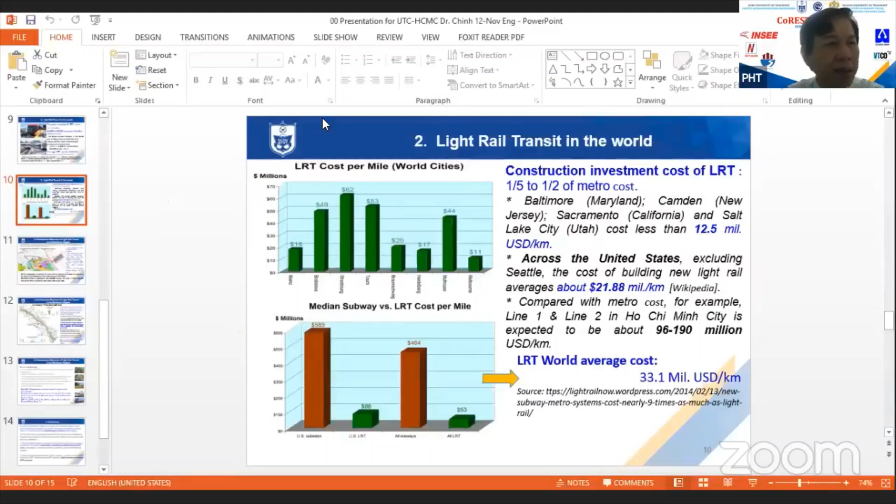The presenter will be Mr. ISHIHARA with the title Opportunity in the Next Decade from Urban Transport. Mr. ISHIHARA graduated from university, and after graduation, he worked at East Japan Railway Company and a consulting company for 14 years as a railway engineer. He was involved in numerous major projects, including restoration and renewal of terminal stations, for example Tokyo Station, a very big station, Shinjuku Station, and Yokohama Station. He was in charge of planning, structural design, and management.

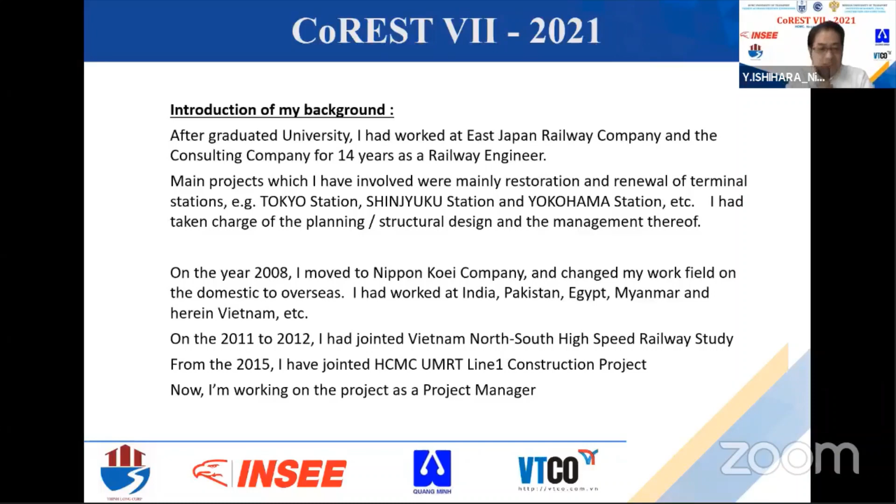Good morning everyone. Dr. Huang, thank you very much for the introduction. Today I'd like to talk about what happened in the previous 10 years for Ho Chi Minh City urban railway development, and what we should do for the next decade to develop the Ho Chi Minh City railway network.

When I first came to Vietnam in 2011, Hanoi MRT Line 1 was just at the basic design stage, supported by a Japanese ODA project. Line 3 was just before commencement of construction. In Ho Chi Minh City, our Line 1 was in the tender preparation stage. Not only railway, but also the east-west expressway construction had been started.

Also, there was an announcement for starting the feasibility study of the new Long Thanh international airport. Under such a situation, I participated in the North-South Vietnam high-speed railway study, where we also considered how to link Ho Chi Minh City Central to the new Long Thanh international airport, like this.

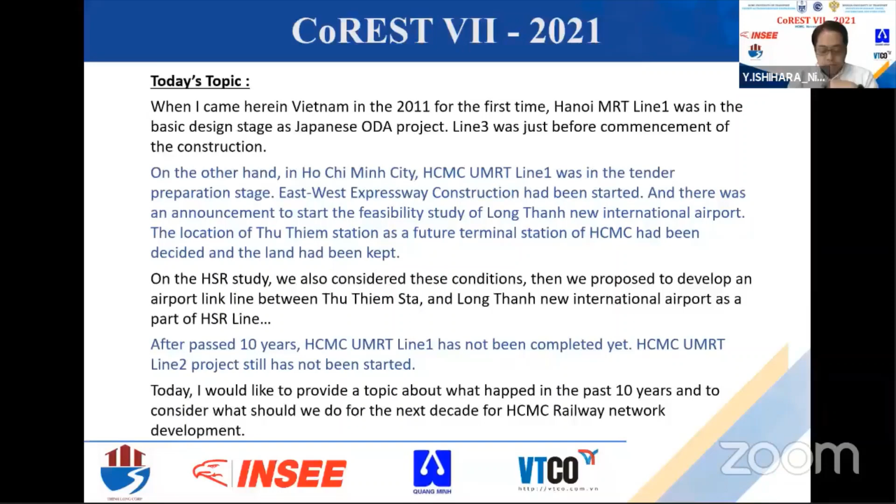After the past 10 years, unfortunately even Line 1 has not been completed and cannot start operation. So today, I'd like to introduce some facts and propose some ideas for the future.

There were existing approved plans in Hanoi and Ho Chi Minh City. In Hanoi, 8 MRT lines were planned. In Ho Chi Minh City, 6 MRT lines were planned. Of course, the master plans were approved in 2011 and 2013, but almost all the basic plans were developed before 2010.

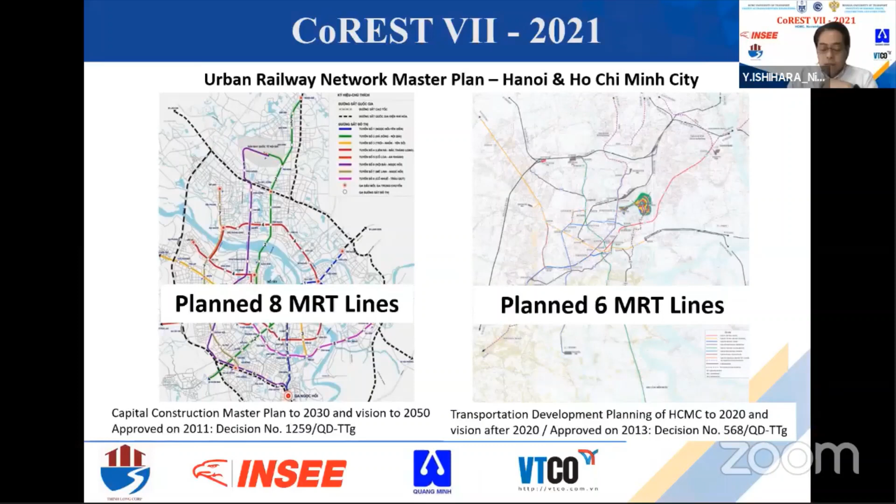After that, in Hanoi, Line 2A, the green line, started in 2011. Line 3, indicated by the yellow line, started in 2010. In Ho Chi Minh City, our Line 1 started in 2012.

I'd like to say congratulations on starting operation for Hanoi Line 2A. I can imagine how difficult it was to reach this operation. Now we are also facing a similar problem to reach official commercial operation.

In Hanoi, construction of the 2 lines is almost all completed. Both lines are elevated. Hanoi Line 2A is around 13.1 kilometers, Line 3 is 8.5 kilometers. Line 3 has an underground section, but that's not completed yet. On the other hand, Line 1 has 19.7 kilometers, with an underground part plus elevated section.

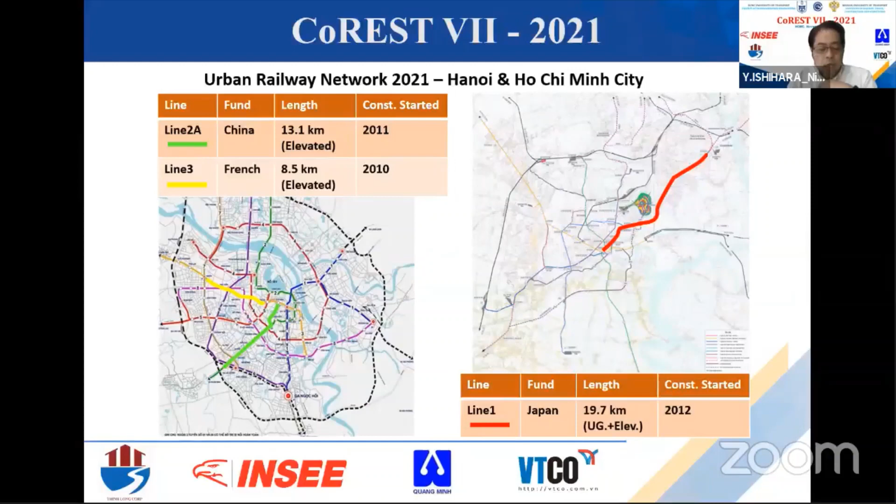This is the existing image of the Line 1 construction. This is the situation at Ben Thanh station - structure construction is almost all completed, and now backfilling and reinstatement of the ground is continuing. This is the Ba Son station situation, now installing railway facilities and doing final finishing.

This is the situation of the elevated station. This is a shield tunnel - the first railway shield tunnel here in Vietnam.

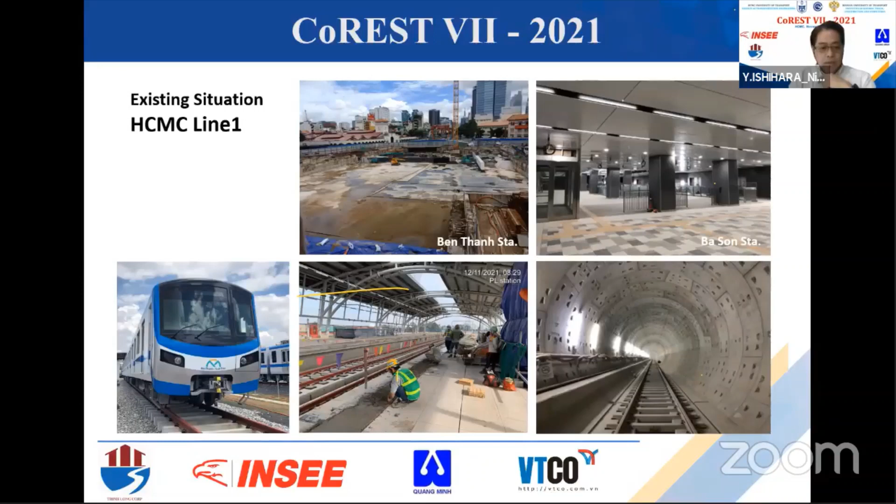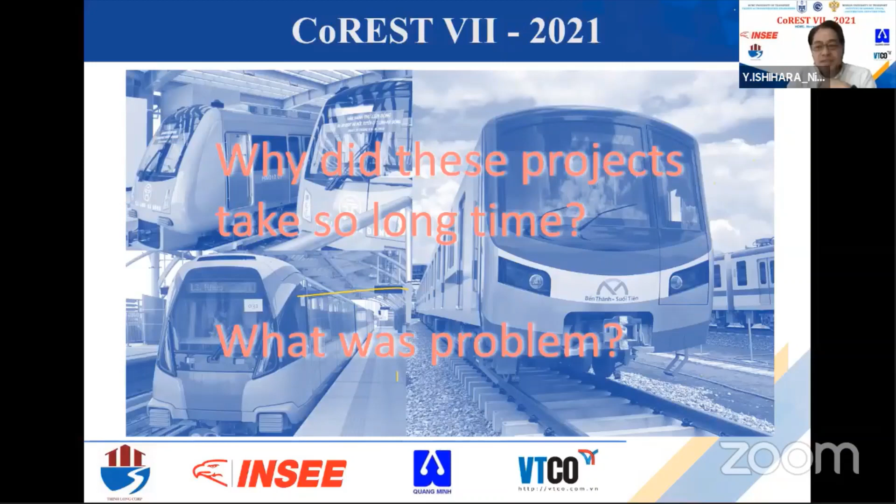So why did this project take so long? What was the problem? I've received so many questions from so many people. There were a lot of kinds of problems on the project, but especially for Ho Chi Minh City Line 1, the main problems were land acquisition and utility diversion, contractual problems, and unfamiliarity with urban railway projects, cost, and budget.

Anyway, if we look at them positively, they were good lessons. Here in Vietnam, we experienced 3 MRT projects with support from 3 countries, almost all at the same time. This is quite unique and a good lesson, I think. So the important thing is don't make the same mistake twice in the future.

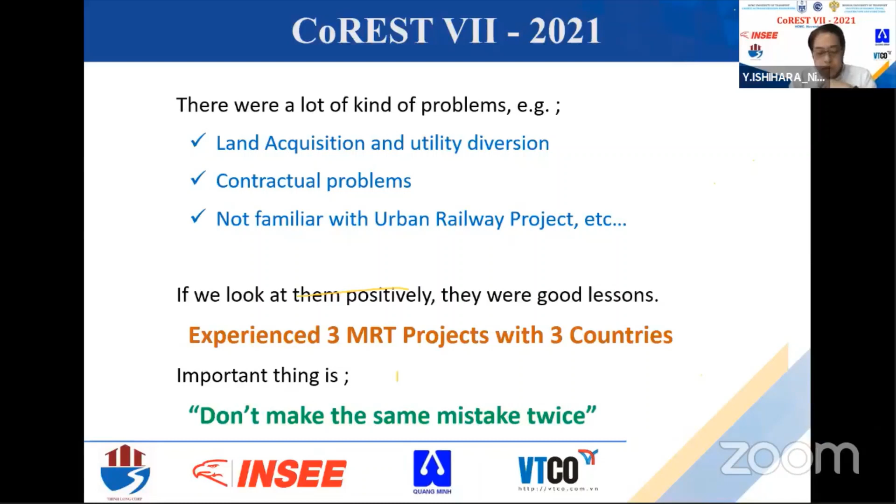Now the social system is changing. System change is required due to climate change, environmental damage, etc. At the last COP26, we discussed this issue also - we are requested to reduce CO2 drastically and quickly. But we also have to consider the balance between social growth and nature conservation.

So development and redevelopment of the public transportation system shall be accelerated. That is important.

Recently, the Vietnamese central government, the Prime Minister, decided and announced for Ho Chi Minh City area a master plan, target 2040 to vision 2060. Also approved the railway network plan for 2021 to 2030, vision to 2050, such like lines nominated.

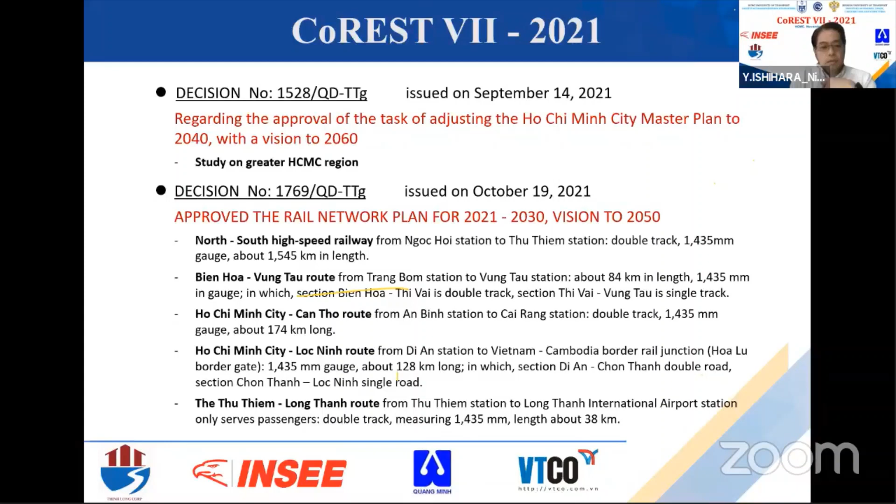So what is needed for future railway network development? How should it be considered on the next transportation plan? I know there are many ideas and objections, but I would say we should not aim at ideal ideas excessively. Consider a realistic plan with practical strategy.

In particular, we should not plan only for urban railways, but consider a comprehensive transportation system, prioritize projects, consider synergy of projects, not only railway, but also road and expressway projects, and should consider regional growth and benefit, not only city-inside transportation, but also intercity connections and logistics networks.

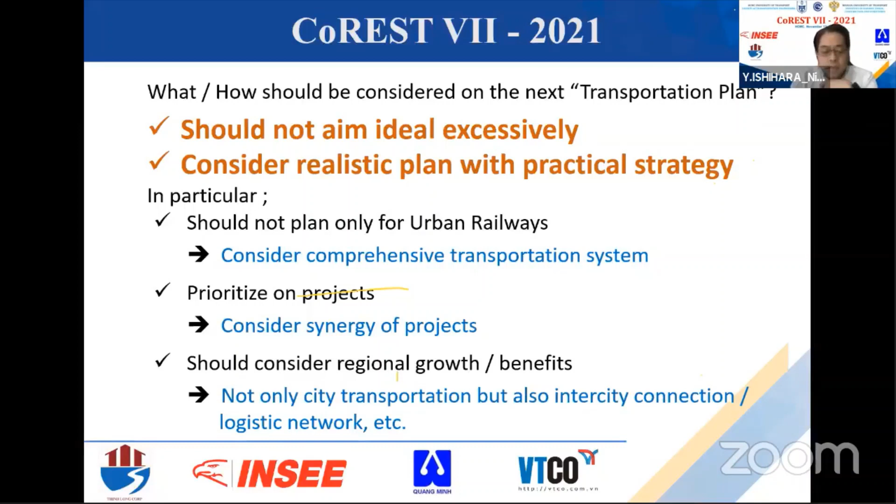Then how to feedback lessons learned to the next project. I'd like to say, look back at each project, then list out problems and troubles, share the information, share experience and lessons, study countermeasures, reflect them in official regulations or instructions. Finally, feed back to the actual project, reflecting on bidding and contractual documents.

So about the strategy for establishment of the Ho Chi Minh City urban transportation network. Shall we develop considering development easiness? Easiness means not only normally, but we will consider theoretical analysis, academic analysis based on collecting actual data or future plan data.

But take into consideration the physical project progress. We faced so many problems compared with the plan on the desk. Especially for underground construction, it's quite complicated and takes time and cost, very complicated. We need so much discussion.

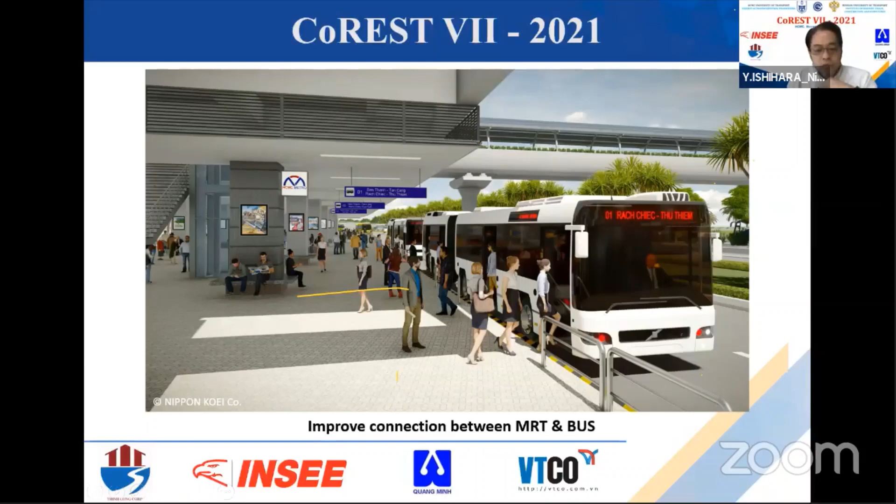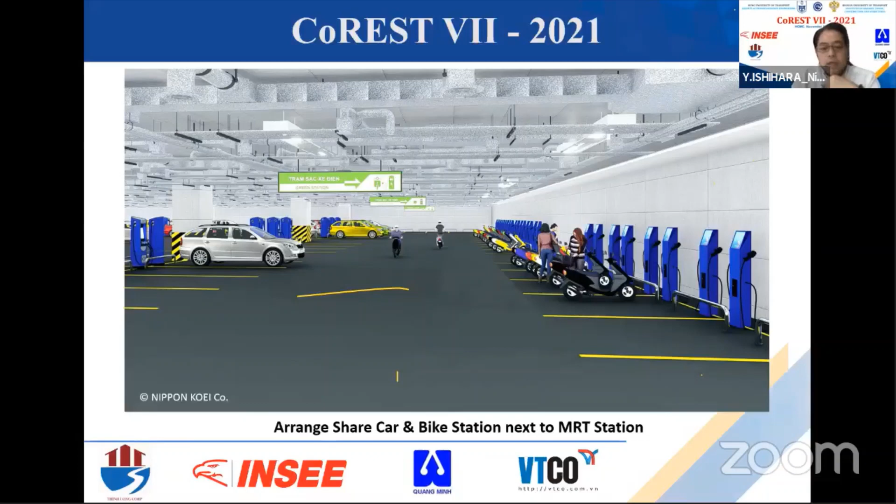One more idea is to develop bicycle and car parking, not only private ones, but share and rent bikes or rent a car near the station. This is one of the ideas.

So the third strategy is consideration of intermodal facilities with city development. This is one of the images. Now we are just developing and constructing a metro station, but unfortunately not including such intermodal facility development or coordination with future development near the station.

So for future projects, we should consider at the beginning things like the connection between the metro line and another feeder transportation—how to develop and realize an effective connection that is much easier and more convenient for passengers.

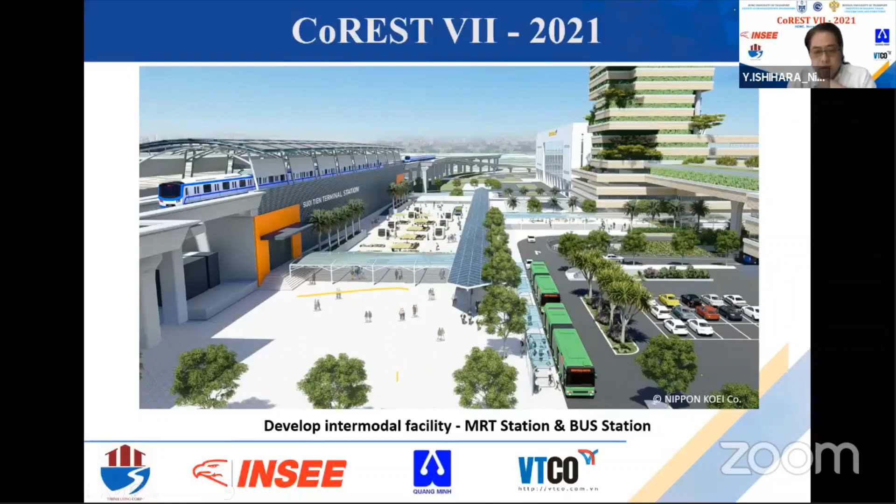The fourth strategy is to consider multi-purpose use. This is one idea for utilizing underground space. As you know, underground development is quite expensive and takes a long time, so using it only for the metro line is not so feasible. It should be utilized not only for part of the station, but also in between stations, using underground space as a corridor for passengers, a corridor for utilities, and for parking space.

One more idea is to develop a reservoir tank for keeping flood water temporarily. Such multi-purpose development will help city infrastructure development more effectively.

So the fifth one is to unify the standards and specifications as much as possible. Infrastructure development now requires not only railway, but also a road system, bus, shared ride, and other modes.

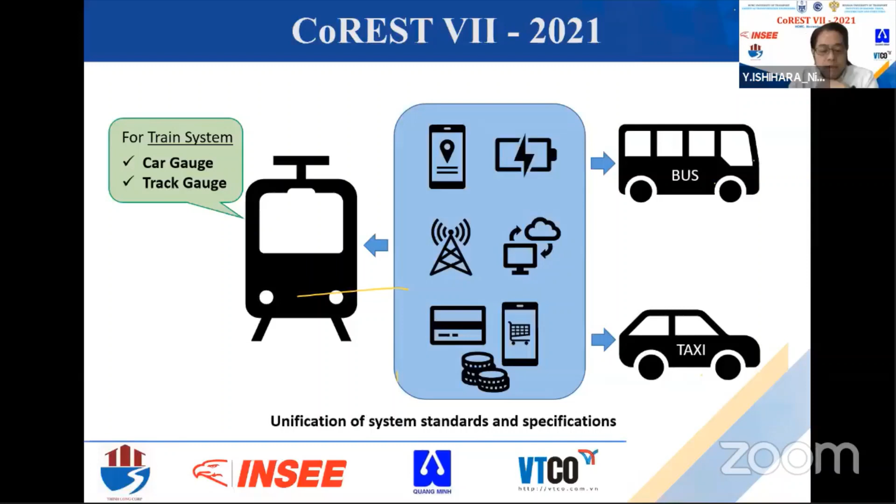Also between the railway system and other bus and taxi systems, applications should be unified, including battery system or propulsion system, energy supporting system, telecommunication system, data collection and accumulation system, monitoring system, and accounting system. Such a basic system will be one of the city infrastructures for the future, digital infrastructure for the future.

So the last one is to create reasonable regulation. As I mentioned, underground construction has so many problems and takes time and cost. One reason is, according to existing regulation, the land above the tunnel should be purchased in advance. After completion of the tunnel construction, it cannot be utilized for private companies' development.

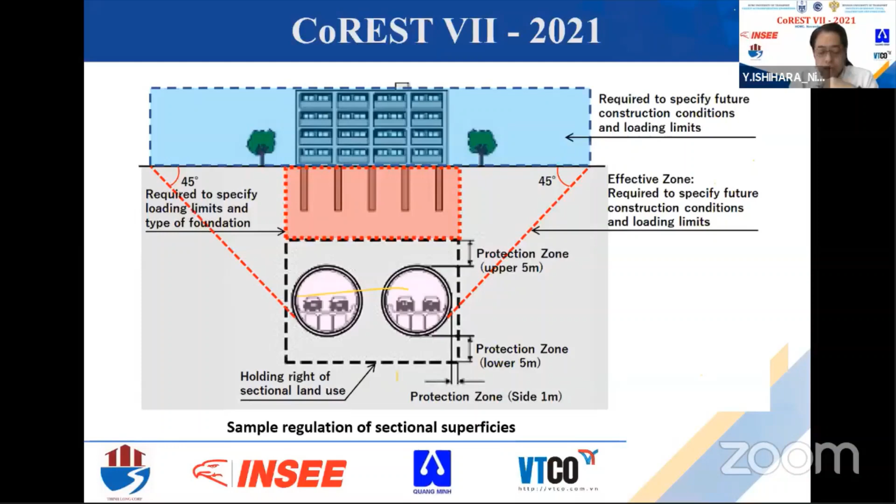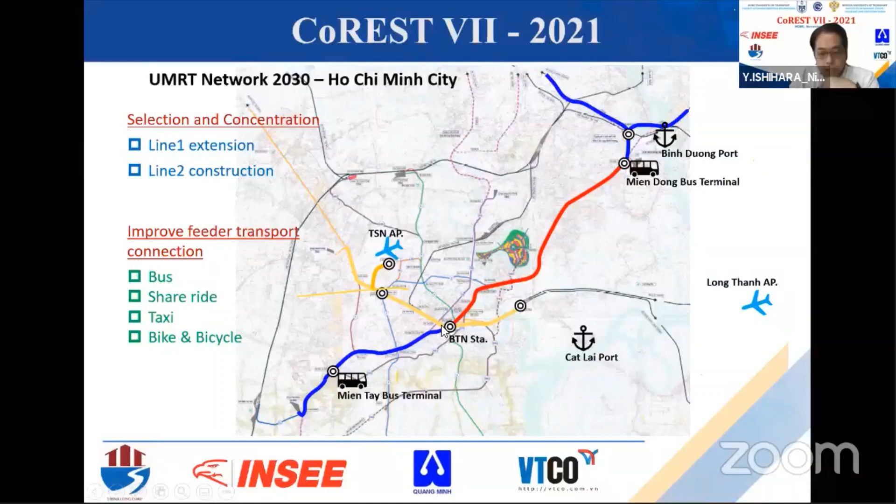So once we develop the urban railway network, it's not enough for the future. Further growth of the greater Ho Chi Minh City area needs a more optimum regional transportation system. So we also need to make a plan considering development business.

For example, rehabilitation and renewal of the existing national railway line, and to develop the airport link along the existing highway, expressway. Another example is to develop the ring road with the urban railway network and connect it to another railway network, utilizing it to link to the airport link line.

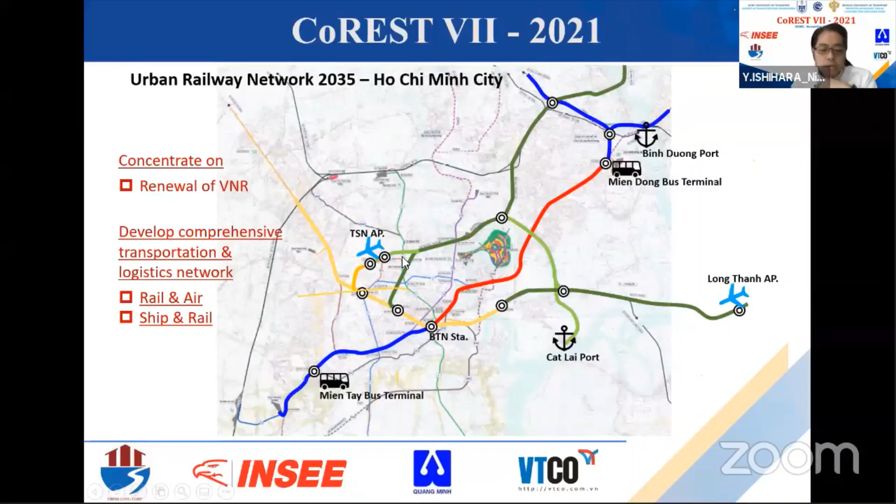We must, as much as possible, utilize existing infrastructure and connect lines as a network. And not only for passenger transportation, but such lines should also be utilized as part of the logistics network, to connect port and airport, airport to airport, and others.

So the second target, as I mentioned, is to develop a transportation network for passengers combined with logistics. This is just a rough image. Once we adjust the size of the train, we can utilize it for both passenger operation and freight operation.

Even with the remaining narrow gauge of the existing Vietnamese national railway line, we can add one more rail. We can operate narrow gauge and standard gauge compatibly. Even electrified and non-electrified can possibly operate on the same line.

The right photo is one example of utilizing a metro line for small goods transportation operation as part of city logistics. The lower right side is in Europe, which has already started high-speed railway freight operation. So in the near future, such transportation systems will also be required.

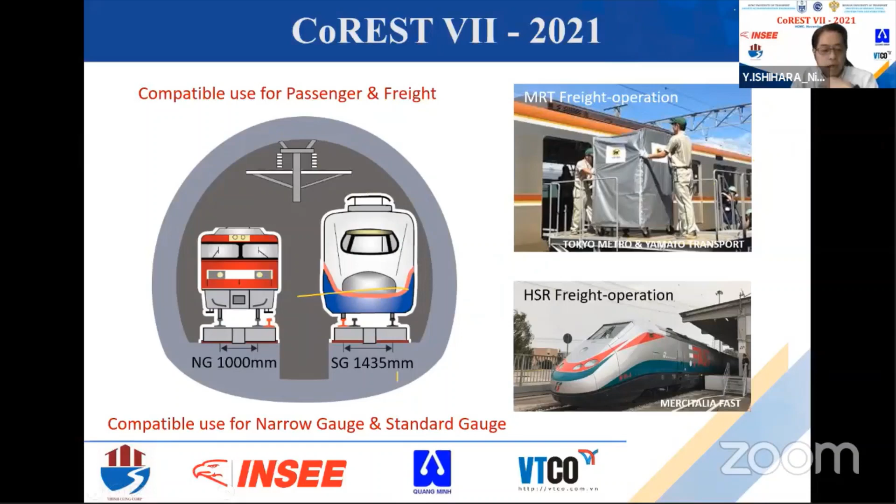So the third strategy is to utilize this technology. One reason for the high cost of developing urban railway networks is the need to develop and equip power supply systems and catenary systems.

But now, new train propulsion systems have already been developed using battery and hydrogen fuel cell technology. In the near future, hydrogen engine locomotives will also be possible. So we can simplify the railway system and minimize cost in the future, and such trains can even operate on non-electrified sections.

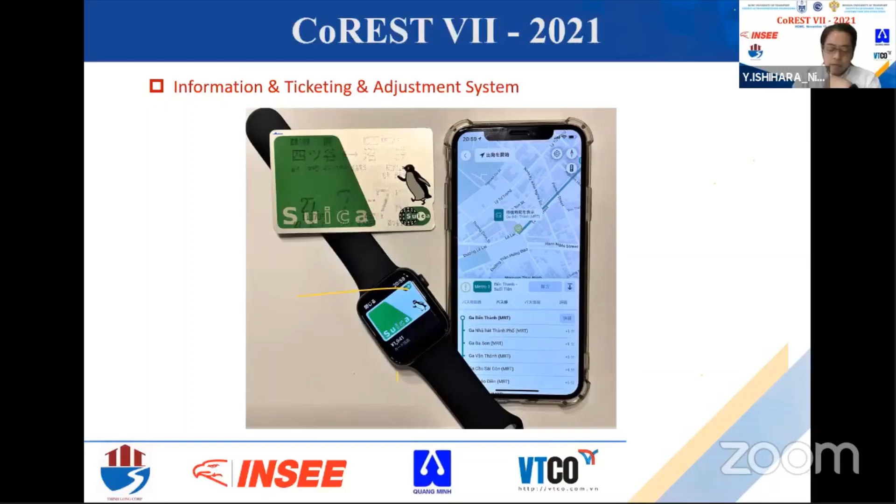One more important thing is the information and ticketing adjustment system. On Line 1, we will introduce IC cards, but already we can utilize mobile phones and smartwatches as equipment for ticketing and adjustment. Information can also be provided through applications and mobile phones, so train operators can provide and passengers can utilize confirmed information by themselves easily.

So the last one is to develop transportation as a comprehensive system. In the future, not only metro lines, but we should consider that a more optimum transportation system should be selected, such as an AGT system, monorail, light rail transit, bus system, electric car, automatic operation system, etc.

So finally, we should aim for the goal of realizing a zero emission society. Even in the Ho Chi Minh City area, it's not only required there, but also to connect other cities, from the Can Tho area to Ba Ria-Vung Tau, to the frontier, to the border of Cambodia.

Anyway, we have to do so much. We should consider more effective development for infrastructures. Thank you very much for your listening.

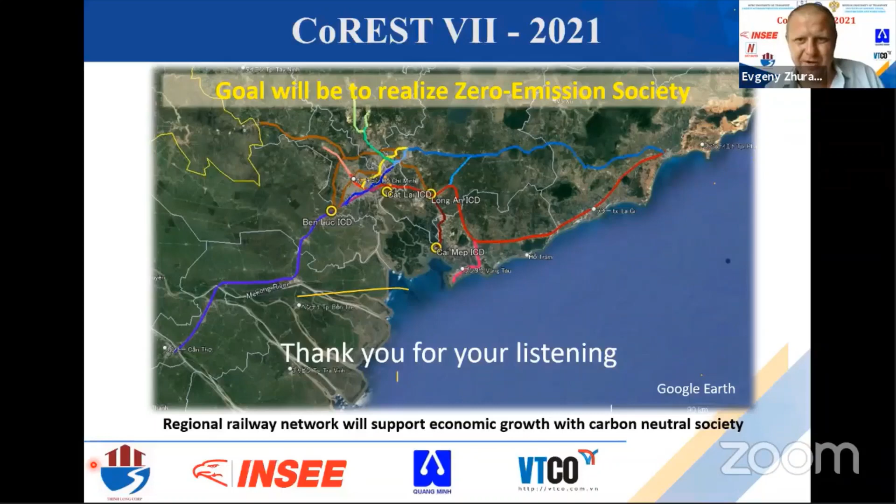Okay, that's my comment. Now my question number one, Ishihara-san: one of your slides says Ho Chi Minh City needs ride sharing. Tell me please, what exact type of transport do you have in mind for ride sharing? As you know, based on Ho Chi Minh's realistic situation with the transport system and economic system, what kind of transport do you have in mind for a shared-ride model?

At this moment, our main interest is how to utilize the line after completion of Line 1. Everybody understands that just one line is not effective, so we need a certain strategy and some ideas to expedite use of the metro line. One idea is to equip shared rides near the station. But the problem is that Vietnamese people are familiar with using a motorbike directly from in front of their house to their destination.

So if we want to expedite utilization of the metro line, we have to consider last-mile mobility. Rental bikes and rental cars from the station for that last mile are one important solution. Of course we also have to consider feeder bus network replanning or rerouting, and consider the location of bus stops, and unify the ticketing system for convenience that we have to provide for users and passengers. That is my opinion and consideration.

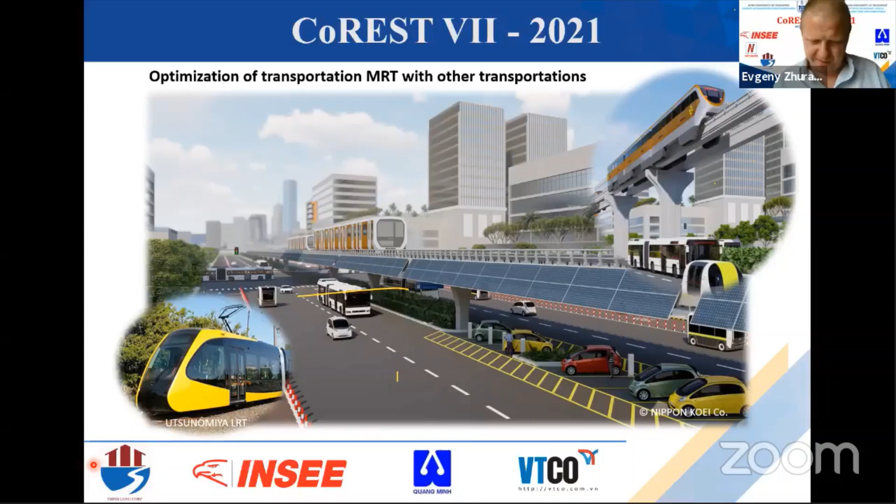Okay, so I understand the main idea is to use the metro station like a public garage for shared rides on motorbikes, correct? Okay, understood. Question number two, about your slide on underground tunnels for moving cars - the transport idea is clear, no problem. Only one question: what is your personal vision and idea on who will invest, and what model will be used to invest in tunnels - for example in Ho Chi Minh City or Hanoi, it doesn't matter - including, of course, the Vietnamese economic model and situation. Tunnels under the ground is clear, but who will pay for it and who will invest in it? And if it's private investment, how can the private investor get a return on that investment?

Okay, according to our experience with underground development in central Ho Chi Minh City near the Ben Thanh area - anyway, we have to excavate from the ground to the bottom. The metro line depth depends on existing conditions. But we also have a limit to how shallow we can make the track level, so we cannot avoid extra excavation above the track area.